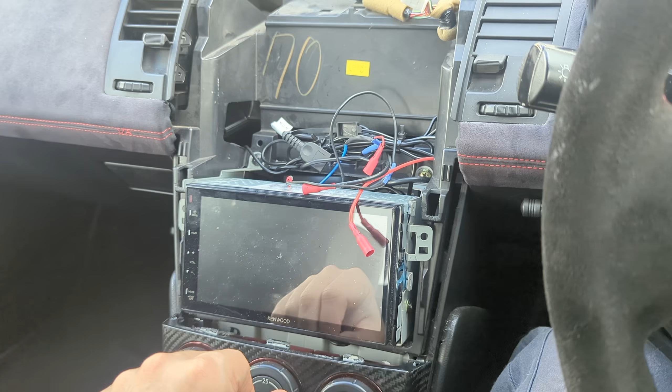Obviously my center console here is missing at the moment, but this is what it typically looks like. There's the big cubby at the top, which in some versions of the 350Z has a sat-nav in it. Below that I have my double-din stereo, which is a Kenwood DMX 125 DAB, 6.8-inch double-din, and it's been great, but it's only ever had to basically play Spotify.

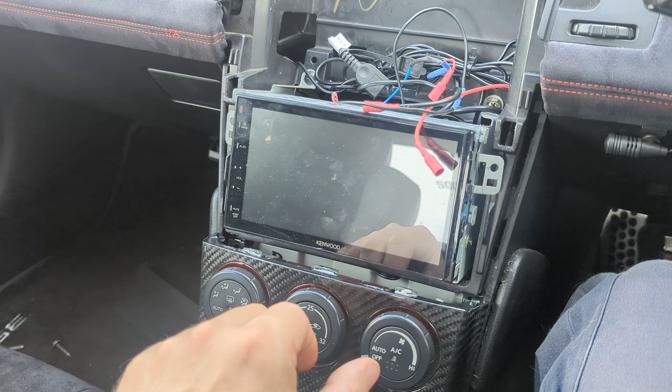I want to put my maps on there and not have to take my eyes completely off the road. I don't want them to be on my phone anymore. I want it to have integrated music with Spotify and whatnot, I want the reversing camera in there, and I want to be able to run my own apps which control things like the underglow, which is what these additional power wires are, and have all of that and whatever other controllable stuff I do be usable through this head unit.

But the big thing I'm going to do is relocate its position up to here. And we've gone for a big 9-inch screen, which we're going to integrate into all of this space that we've got, that is usually where the cubby is.

This presents a few distinct challenges. One, I'm going to have to figure out a way of Frankensteining the existing front fascia so that the new head unit can be moved upwards into its new spot and still look OEM.

And then I'm going to have to consider how we fill the space that was left behind where the head unit currently is, which will probably end up being all the controls and things that I have for my existing underglow and whatnot. Fortunately, this is a big bit of space, and I think we've got a lot of opportunity.

To put something in there without it being too bad, so long as we can make custom brackets that hold it in place, either attached to this plastic surround or attached to the front of the fascia plate itself. Which way it ends up being really depends on the fitment of the new stereo. So let's go take a look at that and the fascia plate and decide exactly how we're going to make all this work.

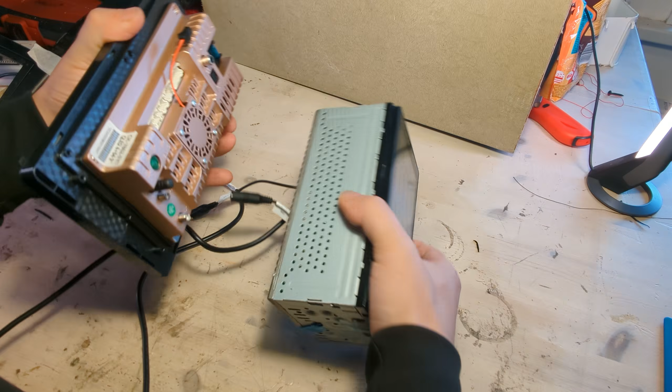To give you an idea of the changing sense of scale, this is the existing Kenwood that's just come out of the car, a 6.8-inch screen. This is the new one that's going in. It is super thin - I mean, this is a thin head unit, but this thing is even thinner. There's nothing to it, it weighs a lot less, despite the fact it is so much bigger.

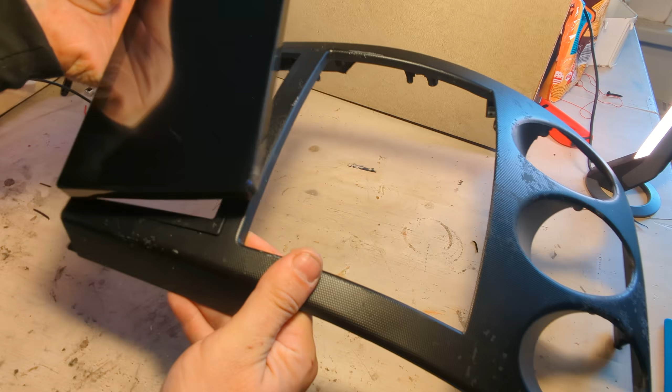So this would never fit, regardless, in this front faceplate. This is how big it is - it's nowhere near. But with a bit of work it will fit in here. So I'm going to have to cut away some of this faceplate, make a custom mounting bracket for the back to hold it all in place, and then smooth it onto the front of the plate somehow.

It's probably going to be a combination of 3D printing and then some form of filler, whether that's foam or Bondo or whatever kind of filler it is. But this needs to be sunken in a bit more here. Before I start wildly cutting into this, I need to figure out exactly where the placement of this is going to be, to make sure that the angle's good and there's no reflections from the windscreen or whatever.

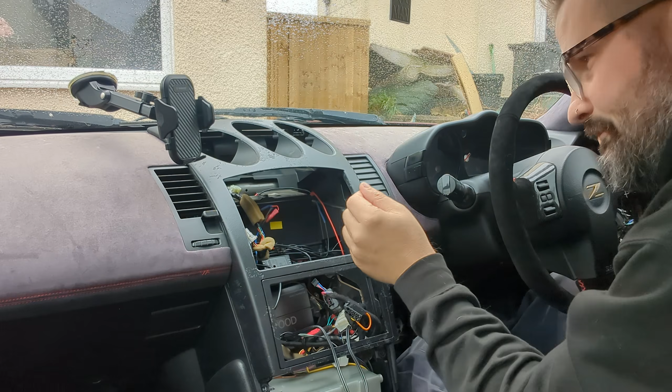So we'll go take all of this, take it into the car, and figure out exactly where it needs to go. And with all this removed, we can just check the space that we've got. My concern was that this lip on the side was going to need a lot of space for the vent, but it really doesn't.

So long as I'm basically majority inside this outside edge on both sides, we should be good. But where exactly is this going to sit?

So it's going to be kind of this height. The question is, do I want to do it flush to the panel so it sits completely in, but at more of an angle like this, or do I want it straighter up, which will require more work, building off of this? You could go either way. You could do it like that, and then we'd have to build all this up custom around the sides here, or we could do it like this, and it will look a bit more OEM.

The disadvantage I'm immediately seeing there is at that angle, I get a reflection from out the window onto the screen, which might make it a little bit more difficult to see. But if I drop it to the bottom, that basically all goes away. And even with the slightest bit of angle here, it's good.

So I think it might want to be raised out ever so slightly at the top. Bear in mind, it's not going to sit this far out - this is all going to be recessed. So I'd say maybe there, at like that kind of angle.

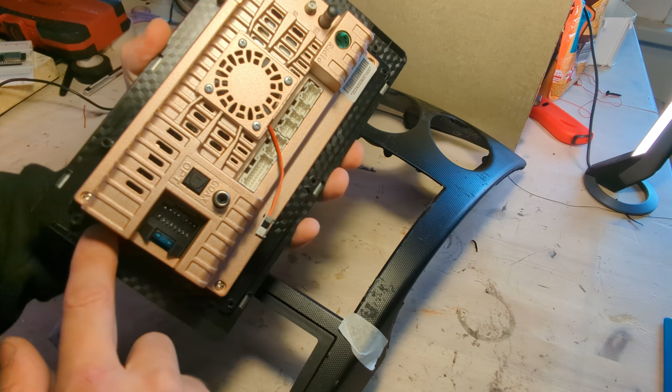Yeah, so it turns out I actually didn't need to do this bit here, and I could have done it after I've done the 3D printing bit later, but I'm going to leave this bit of the video in so you can see the process I went through figuring that out on both sides, and then put this in place and figure out exactly where my mounting brackets all need to go. Make it in CAD, in Fusion, and then 3D print basically a surround that this can sit straight snug into.

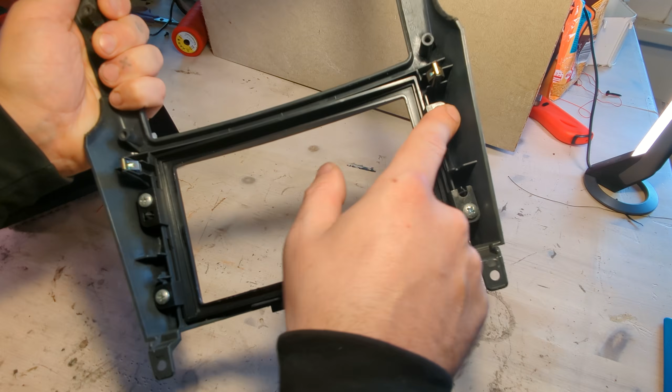Then this bottom bit will be a lot easier. We're just going to remove this surround plate that was from around my double din and make a new thing that sits here, which has buttons and things in for different things. At the moment it's going to be probably for my underglow, but this is very subject to change with some upcoming projects. So I want to make sure this is all removable and changeable so I can put different things in here as I change what this section is going to do.

So let's make a template of this front face. Fortunately, it is completely flat, so I can put it face down on some cardboard, trace it around the edge, and that will be my base template. And then I can transfer this into CAD afterwards.

But tonight, the main job is to cut these bits and try and get this lined up so I can decide how I want to have it sitting, basically.

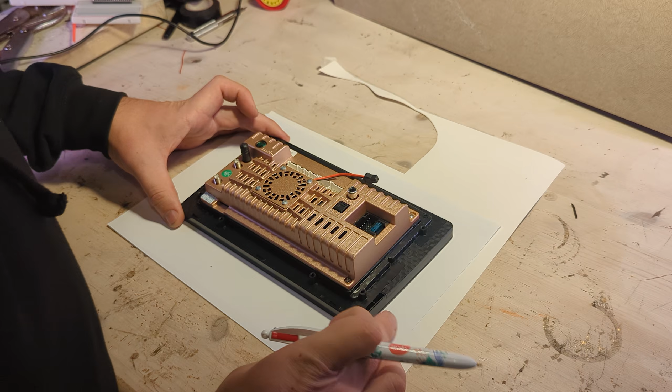As I said, because the front of this stereo is completely flat, we can literally just trace around the outside edge of it in order to get a template. Then I can go around and mark the points where the little holes are, where the mounting screws are going to go, and join up all of those lines in order to get positions for where the screws will be.

I actually did 2 copies of this template, one to scan and then one to outline and figure out where to remove with the Dremel. Like I say, this bit wasn't actually necessary, but here it is anyway.

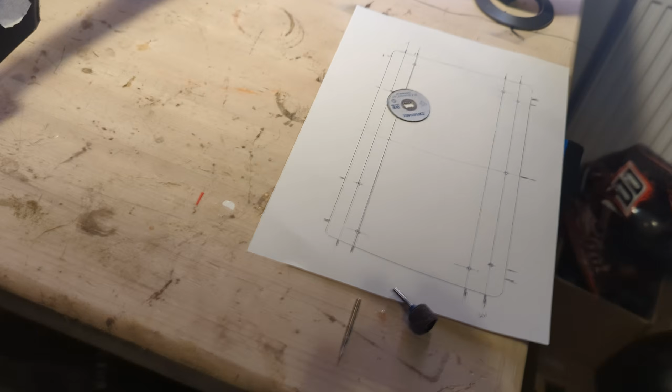Because of the kind of moulded plastic this front fascia plate is, cutting it with a Dremel is really easy. I opted to just use a 38mm cutting bit, and then to smooth things off and do some general roundening, just using a normal sanding bit.

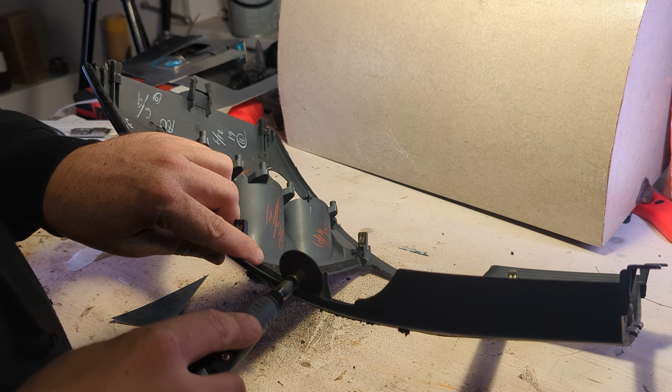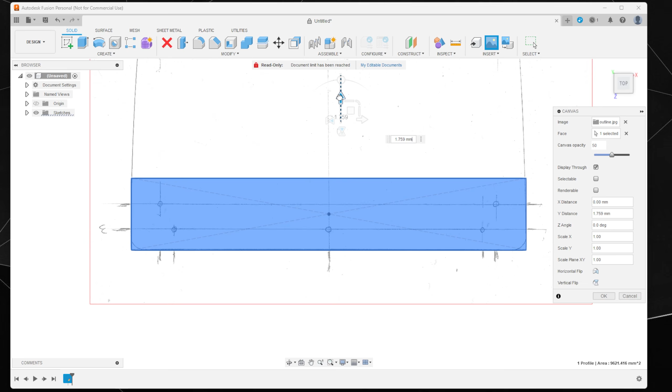Rather than lots of tedious measuring, just scanning the outline that I drew is really the easiest way of getting this template onto a computer, which you can then use in a CAD program. I like to use Fusion 360 because it gives me good control of the minutiae. It's really the easiest way of doing this.

Then it's just a case of outlining all of the templates that I've made, making little adjustments here and there so that all of the lines match up. And that's it—I've got a very basic template which has been created from the real model.

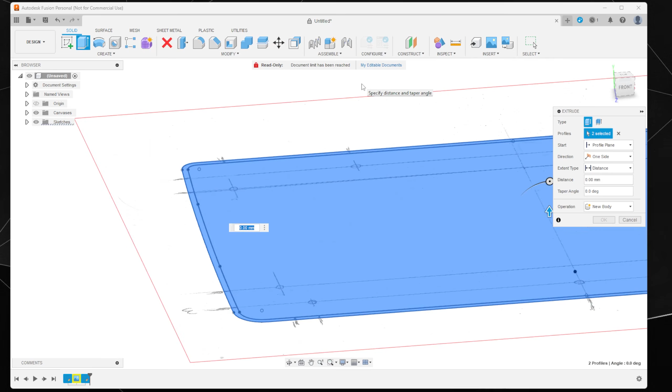From here, I can then start adding the changes that I need to account for tolerances and actually giving the thing real depth. But the head unit has a bunch of recesses and dips and things in it, so I want to make sure all of those are accounted for.

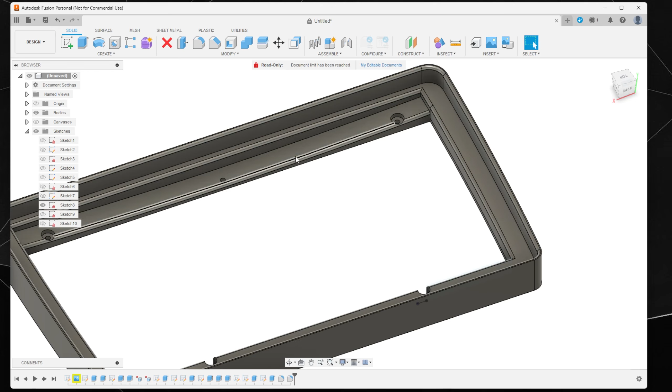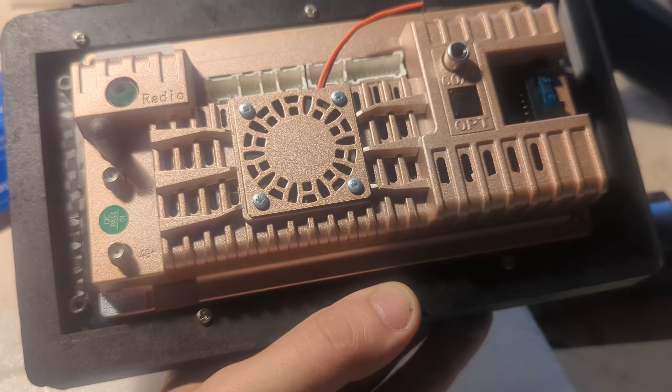I didn't expect it to fit first time. It usually doesn't and needs a little bit of a micro adjustment, but this one straight out the box was perfect. All the screws lined up and there was a nice 2mm gap all the way around the outside edge, which would account for the thickness of the material I was going to use.

I said earlier that I actually didn't need to do the dremeling at the time when I did it. This is when I did need to do it, so I really ended up doing it twice where I could have just done it once. And with the bonus bits removed, that cage fit beautifully into the new space.

So it was time to just test it in the car. First, we just wanted to put the fascia plate back in and then start testing where this thing's going to sit, and just make sure that it doesn't hit anything—which in this case it did.

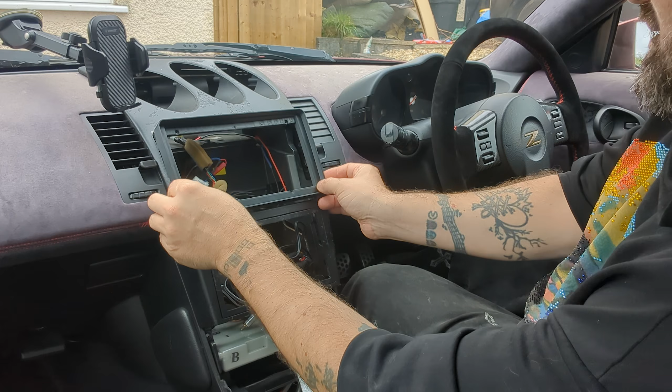It's just clipping the lower corners of the vents, so I needed to remove a bit of material, which I did with the Dremel, just to give it a little bit of extra space to get around those vents.

With that done, it's actually all perfect. I was just able to adjust it in its hole to get the angle that I liked, so that the bottom edge was completely flush and the top edge slightly protruded, which gave it a nice angle in the dash.

So fiberglassing for beginners—it's actually really simple. You take this fiberglass material, cut it to the shape you want, and mix up the resin in the correct quantities. This one is 100 to 3.

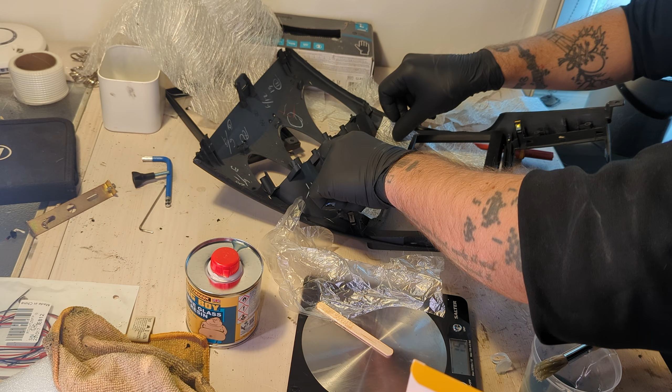Then you put the resin where you want to stick the fiberglass in a nice thick coat. You place the fiberglass where you want it, and then you give it another coat of resin on top—again, nice and thick so that you can see it's soaked all the way through the fiberglass.

You're going to want to repeat this process 2 or 3 times. Personally, I like to do 3 coats of fiberglass because I know it gives me a really hard adhesion that's not going to break. In this case, it's just going to hold that fascia plate in place and ensure that it doesn't move.

Whilst I'm doing these first couple of layers, I'm being really careful not to actually shift the plate, but we're just going back and forth over the top and the bottom, applying multiple layers. Like I say, in this case, I opted to do 3. After it was finished, it looked like this.

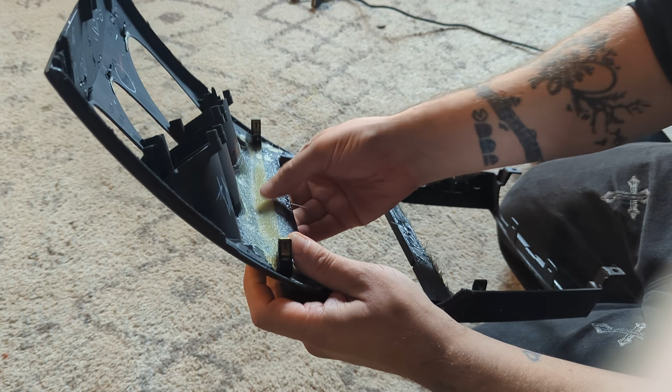After letting it dry for about 2 hours, we had this, which is really solid. You can feel and hear that it's solid—it's not moving anywhere and it feels really strong. It's a great base to then install the stereo and check that everything fits nicely, which it does.

The bonding part of this process is by far the hardest and the most time-consuming, and probably the most artistic part of what we're going to do, because you have to figure out how to transition from the plate to the original fascia.

I'm mixing up some body filler. I decided to use this Big Boy Ultra Fine. I would have liked to use their version with fiberglass in it, but I don't have any, and I have some of this, so it'll make do. What we're going to do is multiple passes, and the first few were really just figuring out how to fill in all the holes and do some very basic shaping to figure out exactly how this transition is going to work.

I'll be honest, at the point where I started, I didn't quite know what the final result was going to look like. It was really just a case of adding more and more filler where I wanted it, and figuring out as I was going exactly what that was going to look like.

The thing is, you don't need to be perfect because you can just sand this stuff away really easily. That's what this entire process is really about. It's about building up a layer, letting it dry, sanding it, and then building it up more, letting that dry, sanding it, and rinsing and repeating until you have the final shape that you want.

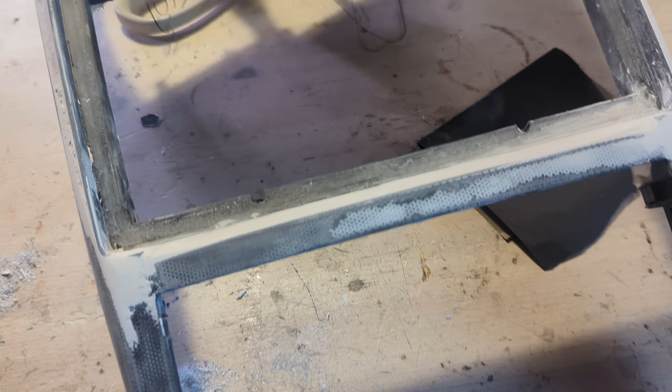Even though I show the sanding here done by hand, it was taking way too long, so for the majority I used a mouse sander, but that's not recorded because it made so much mess. Please do that outside or in a well-ventilated space so you don't fill your entire house with dust. So I took multiple coats here, building up and getting it closer and closer to what I think felt like a natural sweeping transition from the faceplate to the new frame.

So it's the following day, and I'm looking at the options to finish this. But before I do, I need to tell you about something bad that happened.

Yesterday, whilst trimming my mohawk in the garden, my next door neighbour's cat darted between my feet and shocked me. I went, and I cut a massive hole through the middle of my mohawk. So the only other way to rectify it was to do this. And now I've got to grow all my hair again.

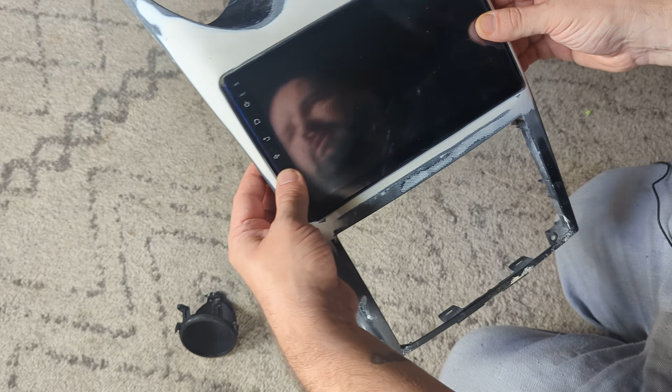Anyway, so I'm going to wrap this. I'm not too worried about perfection in this thing. We've got little dinks and holes here and there, stuff in the putty that you'd clear out if you were going to paint, but because we're going to wrap it in a material, those things don't matter too much. If we do a size fit test with the stereo, the fit and consistency around the outside edge is really good. The question is now, what material do we wrap this in?

I had 4, but really it's only 3 options. First is Alcantara, which I've used throughout the rest of the dashboard. It would look really good. One of the things I look at is how it creases around edges when you get inside folds, and here you don't really get any creasing issues, so that would be really nice when it was all laid down. The one problem with using Alcantara is I've used a lot of it across the dashboard, and I've got a feeling it might be a bit too much Alcantara.

Second option is leather. I have various forms of leather, but this is actually a synthetic PU leather, so it's fake, but it's got a slight stretch in it, which would mean maybe I can get it down into these recesses. My one concern: it stretches nicely over edges, but when you get an inside corner like that, you can get bunching. You need to have it stretched and laid really perfectly, otherwise you get bunch marks around the outside edge, and I really don't like the way that looks. It might be possible to avoid with the right stretching, but could be tricky.

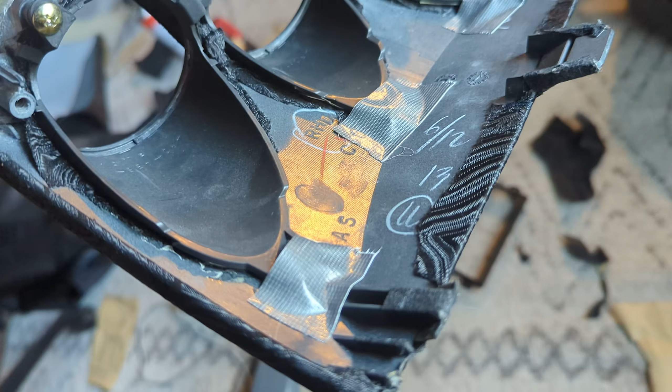I ended up using the same material, and the tuck that I managed to do in here, I've tucked it from both directions so it's nice and neat. And yeah, then just hit it with a lighter, put these back in, and then I had to break these seals, so glued them down and then used some super tape stuff, which should hold all that in position.

So just got to put the rings back in, the gauges back in, attach the stereo itself, and then this bit, yeah, this bit I just still need to figure out and print, but it's pretty simple.

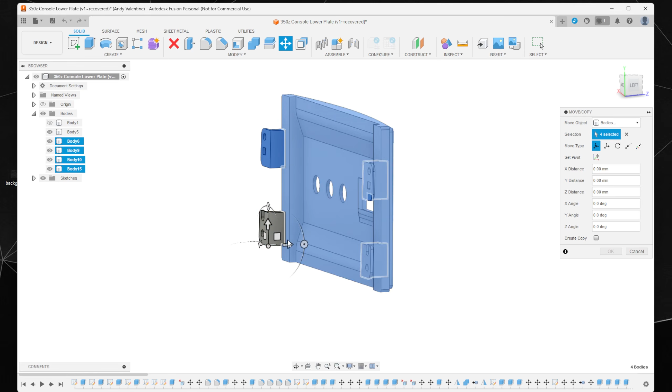It's just basically taking this, which is the piece that usually went in there for the stereo, measure that at all its different points, and then just print it with the holes cut out for the switches that I want to put in. And then I can just probably wrap that in just a gloss black vinyl, or maybe a carbon, install it in here, and yeah, good to go. So hopefully have this back in by tomorrow.

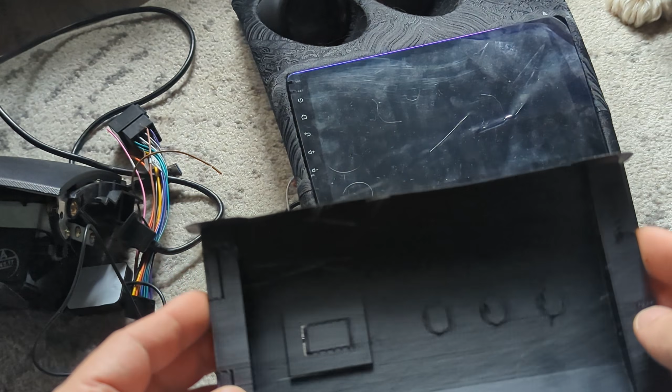With the new insert all 3D printed, you get to do one of the most fun things, which is remove the supports. It always makes nice, satisfying noises. But yeah, so we want to just make sure that this all fits, so we'll do a little test and make sure it's all good. And again, somehow got it bang on first time, which is always satisfying.

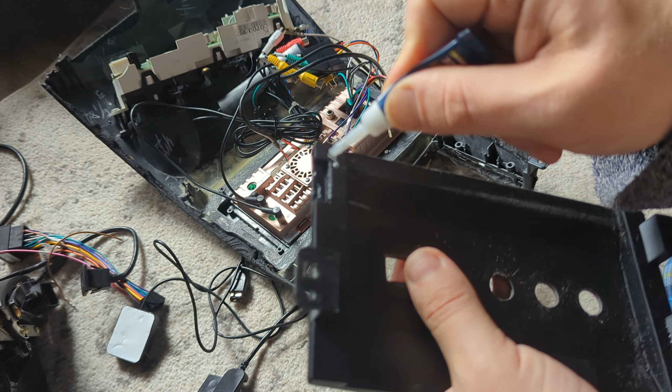Then we've got these little feet. I did these separately so they were an easier print, and we'll just super glue them in place because ABS is completely non-porous, so super glue is the best option. Then give it a quick sand with some 240 grit just to smoothen it out in order to wrap it.

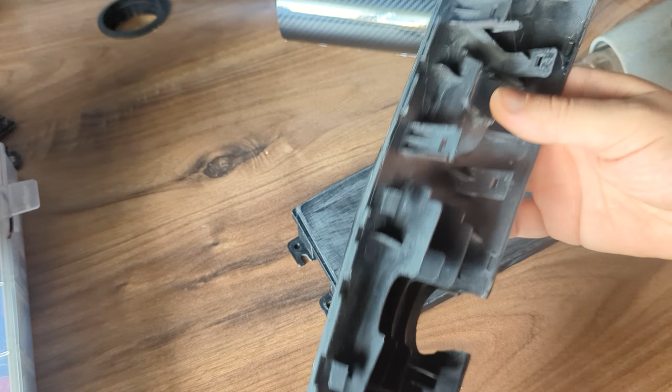And we're going to wrap it in this 6D carbon. It's pretty close to my genuine carbon that I've got in the car already, so it'll do for the short term. And we're just going to very simply wrap this. It's not a difficult shape at all, even with those 2 slight elevations on both sides.

The one thing we have to be careful of is the tight lip along the outside edge. You'll want to make sure that you heat well into the corners to get those pressed out, and then run something sharp, like this wrapping tool, into those corners.

When we're done there, all the way around, we can just cut it out using a knife. Nice and simple. Remove the excess, and then do a quick post-heat to make sure everything is stuck down exactly as we want.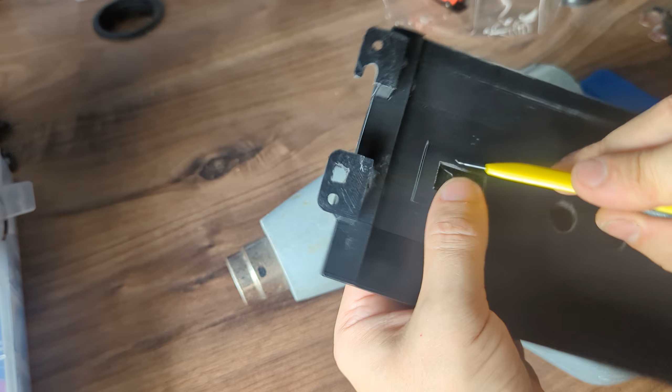Obviously there's currently vinyl in some of the holes where we're going to put the things that go in this fascia plate, so we just need to cut them out. Doesn't have to be perfect, and they don't have to be folded in because stuff is going to cover those edges. The first thing we put in is the USB.

I just want to make sure this has the little blue bit on the bottom, because I'm anal like that. And then pull out the locks just to make sure it's all held.

Then we're going to put in these 3 switches, which are used for my underglow. One of them has the big red cover on it - this is the one that powers both of the other underglow switches. It's basically a master switch that can quickly turn off power to both the interior and exterior glow. Then the other 2, with on-off, one powers the underglow and one powers the interior light.

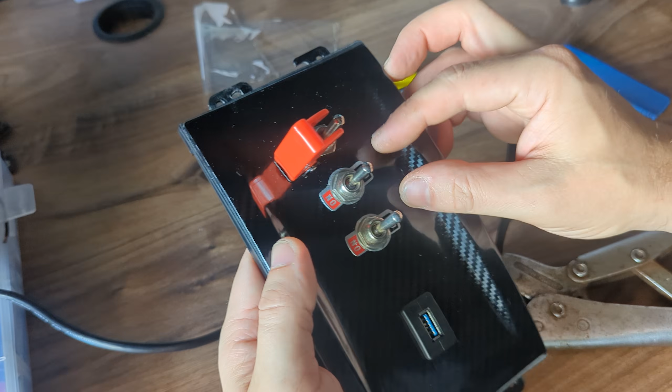What I just want to do is make sure that they're all perfectly tight without being too tight that they crush, and also having the nuts all aligned in the same way.

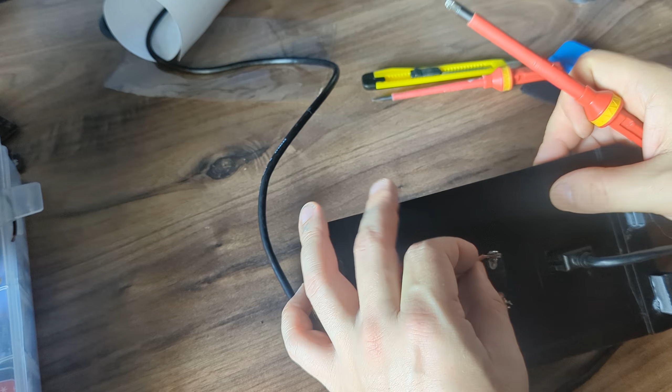When they're all in, we can just wire up the back. I'm putting a wire from the red one to the other 2 - this would be the one that feeds the power over. Then we have an input line that goes into the red one at the bottom, which goes off to my ACC power. Then the other 2 have their various outputs, so the exterior light output and the interior light output.

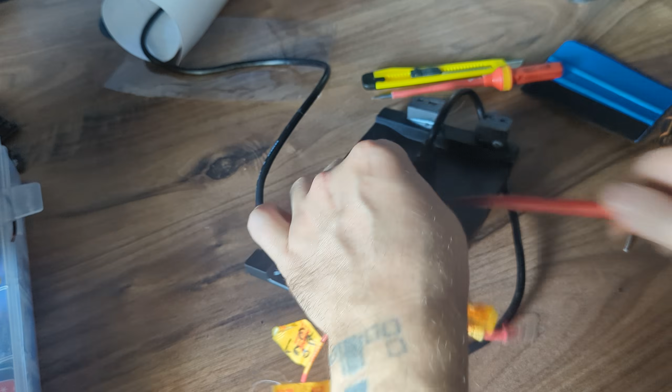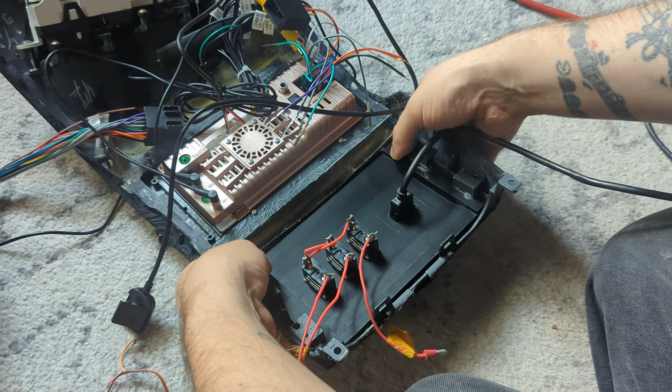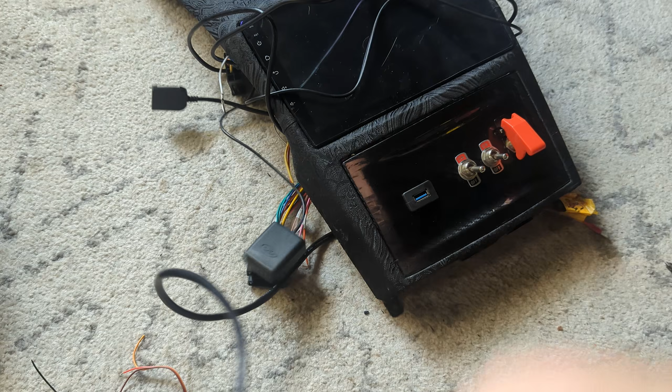Once it's all wired together, we can just pop it in place. Fortunately all of the holes and everything lined up perfectly for the clips, so we can just screw it all back together. With this all done, that is our entire fascia with all the new inputs done and ready to go. Doesn't she look lovely?

With this basically done, I guess we go put it back in the car. I'm still waiting on the SIM card to arrive to put in there, but it should be here today - I'm just seeing the postman walk down the other side of the road, so hopefully it'll be here soon. I should definitely take the jump pack out with me because I've been doing a lot of stuff on the car over the last couple of weeks, but I haven't been driving it, so I'm pretty sure the battery is going to be pretty dead.

Yeah, but let's go put this back in. Yeah, the car wouldn't even unlock, so it is definitely like super mega dead.

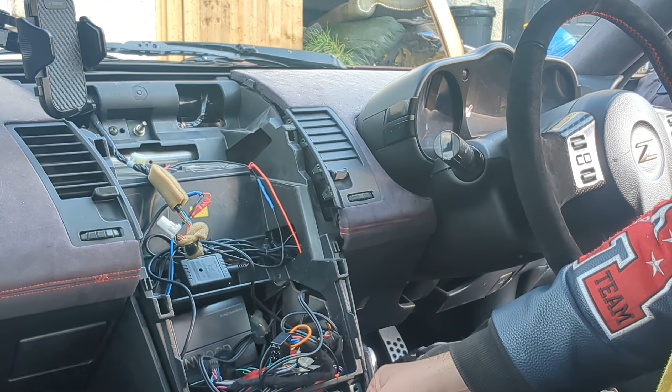One of the biggest complaints people have about these Chinese head units is that they don't amplify particularly well, but I don't use the amplification inside. I've got a Kenwood head unit here, and that's what will be doing all my amplification.

So I need to basically connect the head unit up to the RCA outputs that are in the back of here. This is the thing for the steering wheel controls - I should probably just put a terminal on here, like a bullet connector, and then put one on the other side on the back of here because it doesn't have them.

These are the connectors for my underglows. Let's just move out of the way - these will have to just come down here. But I guess I should make sure it all fits before anything else. Fingers crossed, we're going to be all good.

It's looking good. Before I clamp it down, let's just start this car and make sure everything works okay. I'm just going to plug this back in, because otherwise the AC is just going to go mad.

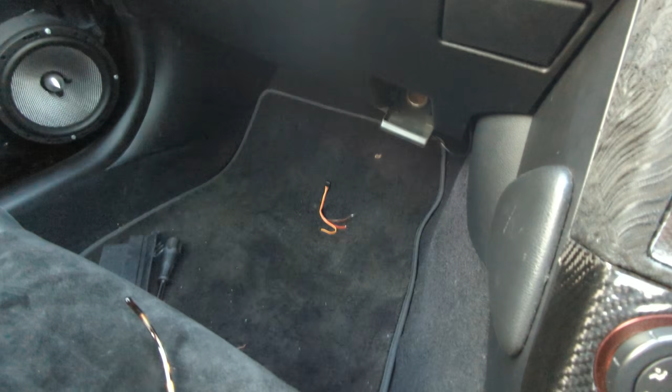Let me just zoom out and you can take a proper look at it. So there we go, oh, this. So that's power, and then that one we can't see because it's under the car, that one's down there. You can see if I turn it on and off, you can see the amber glow that comes on underneath my feet.

And the other one is on currently, which should be blue under here, I think it was set to blue. Oh well, there you go. And then if I turn this off, it all goes off because this is a catch-all that powers off both of those.

Yeah, I'm happy with that. I like how this material looks. You don't see it and go, oh, that's super gauche. Obviously it's going to split the court of public opinion, as I've said a couple of times, but I've used it here and it is used on the lower parts of the door there and actually on the strut bar middle behind me.

So it's a little bit more cohesive and it flows through. And I don't think this is real carbon, this is fake carbon. I don't think it looks too out of place, so that's good too. The things I wanted to achieve with this was that it was easy to look at.

So if I'm looking out the front of the car, it's just there now. So when I've got full screen maps up, it's dead easy to just glance rather than going all the way down there. Also, there's no reflections on the screen. The camera is basically where my eyes are.

If you lean forwards, you can see the reflection, but when I'm sat in my normal position in the seat, you don't get any reflections off the windscreen, which is pretty key. So all in all, I think this is a success.